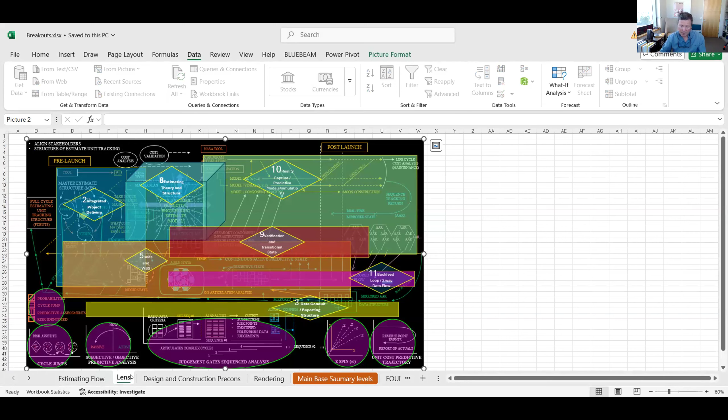Many of you have already filled out the form, so we understand how we can start putting together focus groups, which Patrick is going to be managing.

But before we go there, I want to talk about the rendering that Jabu with Johns Hopkins Applied Physics Lab did a presentation about a month or so ago. This is a very fictitious starting point of what a moon base could look like. It was a fascinating presentation. I hope you have a chance to see the recording if you haven't already.

So the task is, how would we even break out an estimate like this? I have an example to show you, and it also shows the complexity we're dealing with. I've been estimating for 30 years, and many people on this line have been estimating longer than me.

When you see how this can really spiral and cascade into complexity, it's pretty monumental. What I really liked about Jabu's presentation isn't only what he presented, since we had to squeeze it into about half an hour, but also the full presentation posted on the data room, which has the science behind what drives some of these things.

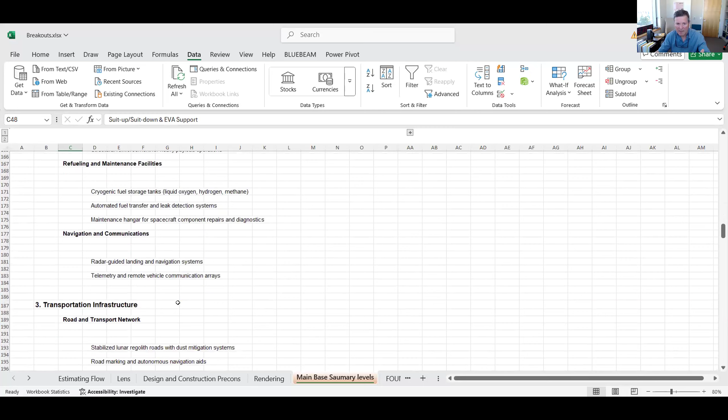So you can see it has science centers, and these are just kind of brainstorming kitchen facilities. And then we go into launch and landing sequences, refueling, maintenance, and on. And we're going to drill down even further, because I want to go through a lot of these so you get an idea that I do understand the complexity.

Because if you take, for instance, stabilizing lunar regolith for roads and dust for transportation and roads, think about just that one line, how that would break out into several more lines. And what's going to be important is that now we're talking about time and mechanisms to actually do the work.

Here on Earth, construction may give unit costs, well it's going to be X, but construction on the moon could be compounding if mechanisms break down, or the regolith isn't working the exact way that we needed, and we're talking maybe hundreds of thousands of cubic yards of regolith potentially. It could be very problematic. So that's why we need to break these down into very detailed components of time, and mission, and whatever.

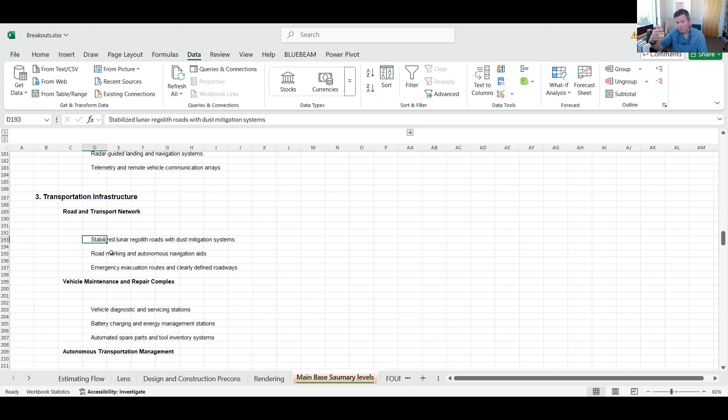But that's just one facet of many of the items that we would have to consider. So I'm going to not spend too much time on that, and let me move this over a little bit so I can see all of it. So we'll go into foundations now.

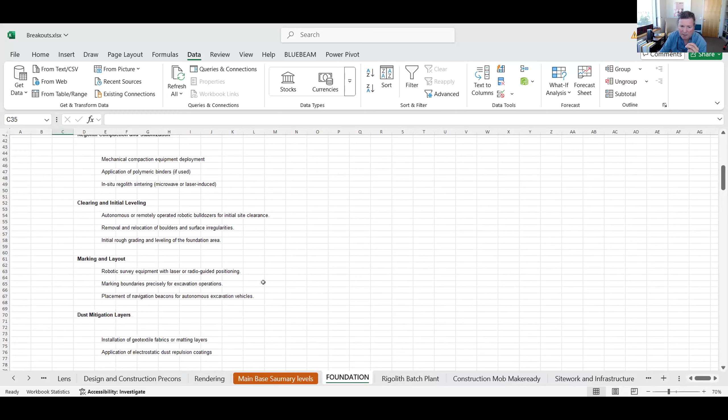And you can see with foundations, all of these - they aren't numbered out yet because we have to come up with a numbering system - but you can kind of read through here: layouts, excavation, earthwork. It says earthwork, sorry that was a typo, my bad.

But you can kind of see all of the components. This is just for foundations. I have checklists on the other thing. So this is what the team is just starting to work on right now: regolith batch plant.

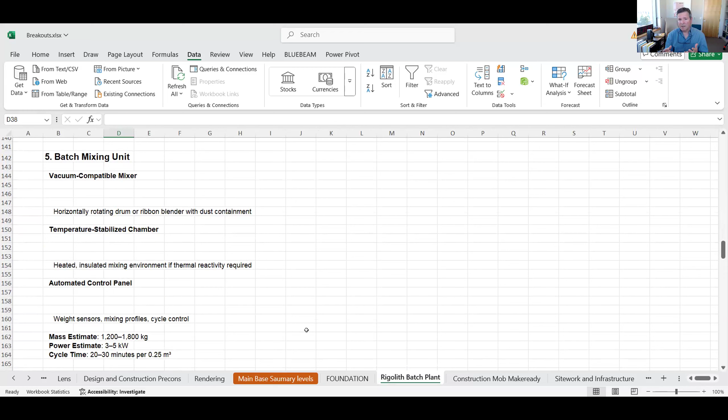Are we bringing it as a payload? Right now, most of the research is trying to figure out how to use existing material from on the moon, as opposed to bringing it there.

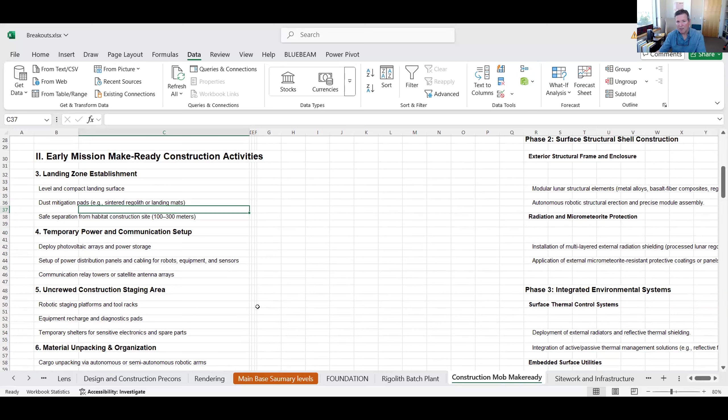Construction mobilization, which is so much more complex than what we are used to here on Earth. If we were building a hospital campus, our means and methods and construction mobilization would be so much less complex than the things we have to think about here.

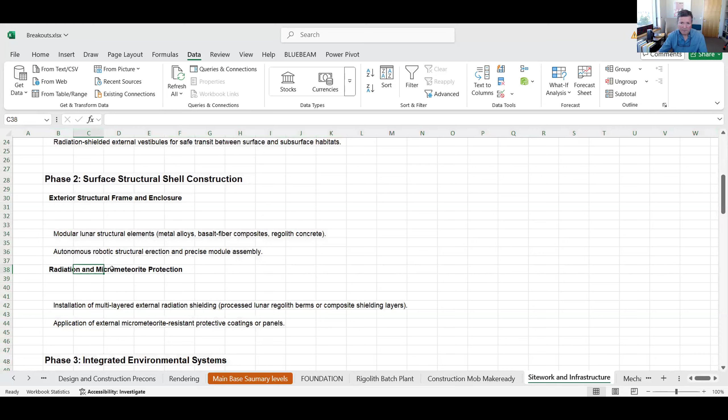I'll just kind of move down here a little bit, to site work infrastructure. Getting the infrastructure, it's probably electrical, let's say. It's not going to be generated, obviously, potentially from a CUP plant connected to a habitat. It probably will be more than likely different systems, maybe not in proximity of the habitat.

I'll just kind of keep moving down here - mechanical and plumbing for the different systems.

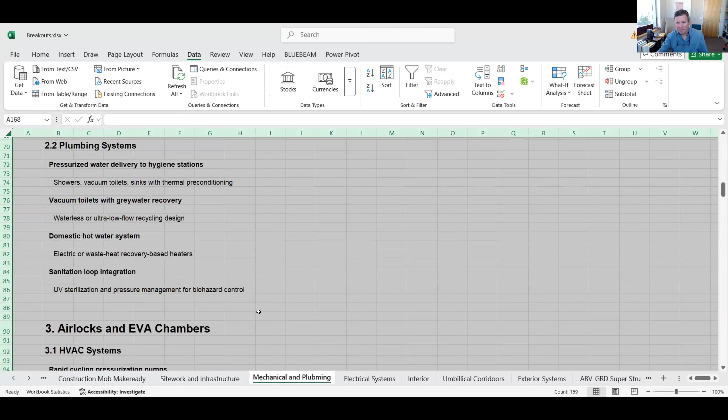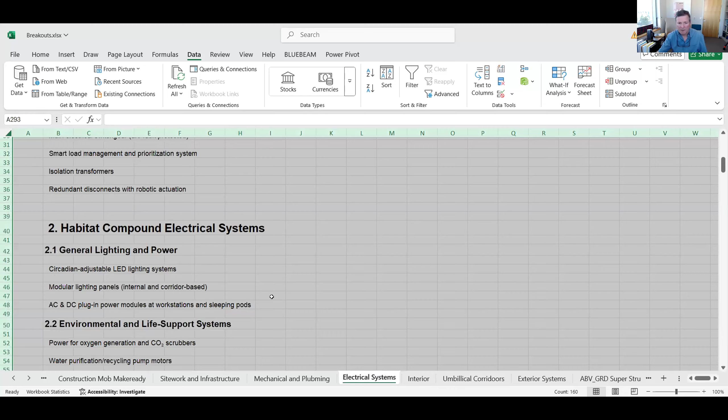Electrical systems, mechanical systems, same thing with electrical systems for habitat. Interior fit out. What would the interior be? What type of flooring, walls, casework, and everything is specialized. And it has to also be brought up, obviously, per payload.

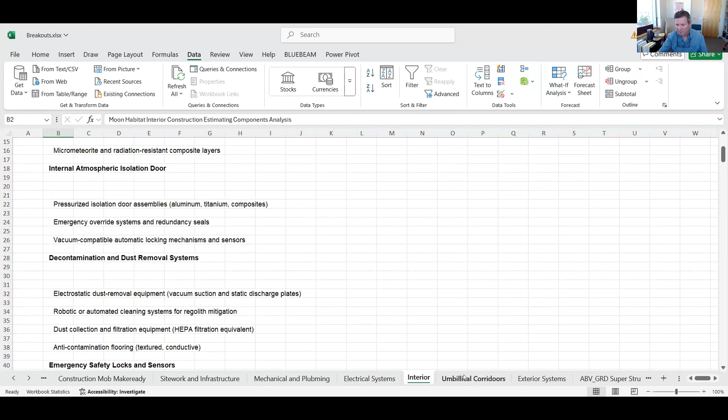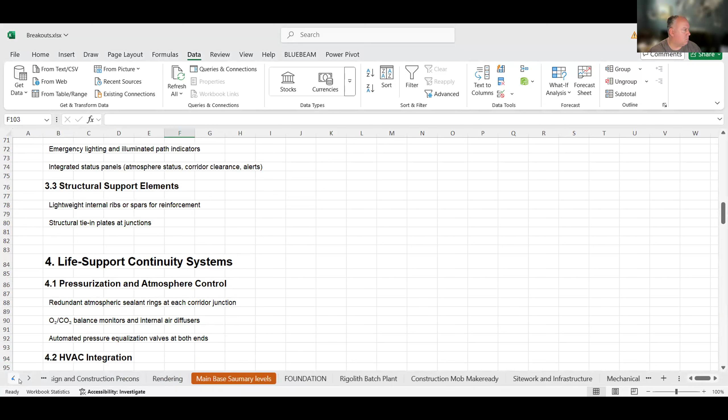These are going to be very important. These are the umbilicals. Let me show you where this is real quick here. Let me see... looks like I can't get over there. There's something on my annotate. Oh, there it is. Well, I have something on. There we go. Let me just show you something real quick.

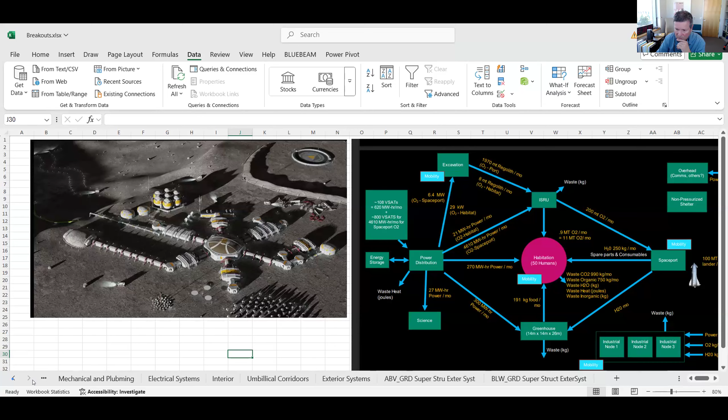These corridors are umbilical. These things are pretty important, not only for safety reasons, but there's a lot of functionality separating these systems. Let me go back here real quick. But each of those connect, and each of those are very complex, even though their function more than likely will be just to connect the two systems together.

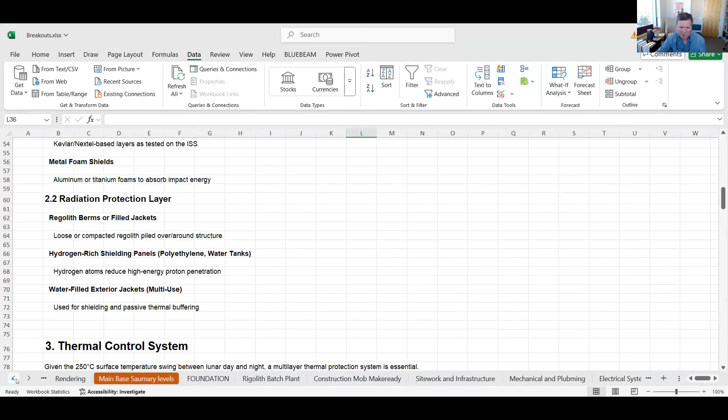Exterior systems. Radiation protection layers. And here's an example. I want to go back to this real quick. It just shows the complexity of why it's important that estimating really understands what's going on. I'll give you an example. You see right here where it says exterior systems. Well, if there's an exterior system and it's underground, that's going to be completely different estimating, perhaps systems that are built if it's underground versus above ground.

To show how this can really be complex in estimating: if you build up layers of regolith—and I haven't heard a lot of talk about this, but there's a couple folks starting to write on regolith charging—if you layer regolith on top, there is a compounding effect. In other words, regolith has electrostatic charge, and the more you increase it, there is a potential of increasing electrostatic charge. Regardless of where that goes, it's important that in the estimating process we understand the risk, and therefore, is it above or is it below?

And each one has a completely different construction process. So you can kind of see superstructure, exterior—all of these are just, again, estimating breakouts.

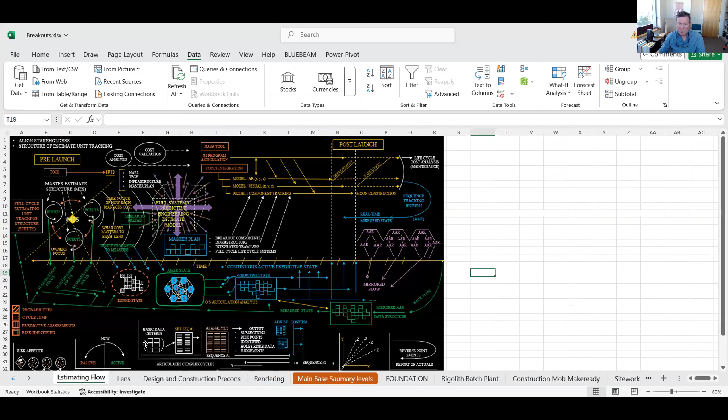So I'm gonna stop there, because I'd like to introduce a couple folks. Are there any questions or comments on what you've seen?

Fred, what's on your mind? I've got to learn how to use my mute button, apparently.

I'm amazed at the detail you've gone into as far as organizing the estimate. Those categories are great—really helpful.

I think the important thing—and all the estimators will get this—is when you have a complex project, you always start overwhelmed, right? Because there's just so much stuff. But when you start layering out the theory behind, or the structure of how everything has a home, that, for me, when the team was working on this, it started to become more manageable. You get more anxiety because it's so complex, but it also creates a level of comfort. That's what kept me up at night—like, oh wow, this is a lot, but at the same time it brought comfort because you can start seeing the rationale and pinpointing the points that are going to be very, very complex.

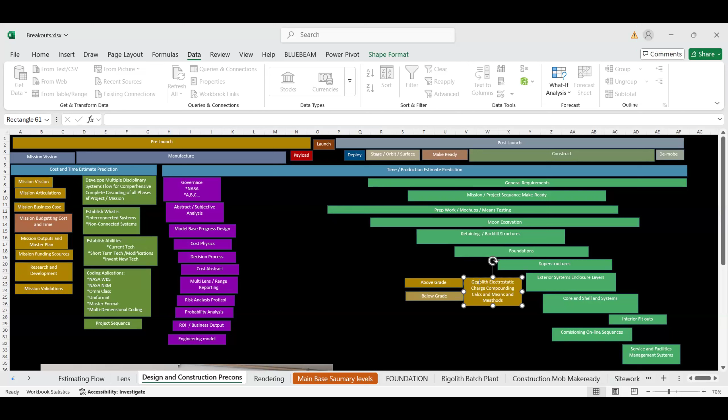But I love what you're saying. So yeah, I don't think we would cut off, Paul. I don't think we would try to eat the horse. No, we would never eat the horse. That's a bad one. We would keep it at chunks that are relevant. That's a contingency plan, I don't know why I say that's a terrible one. Okay, good question though.

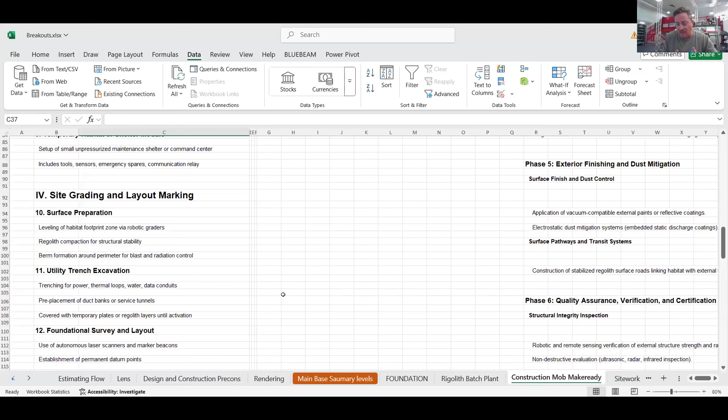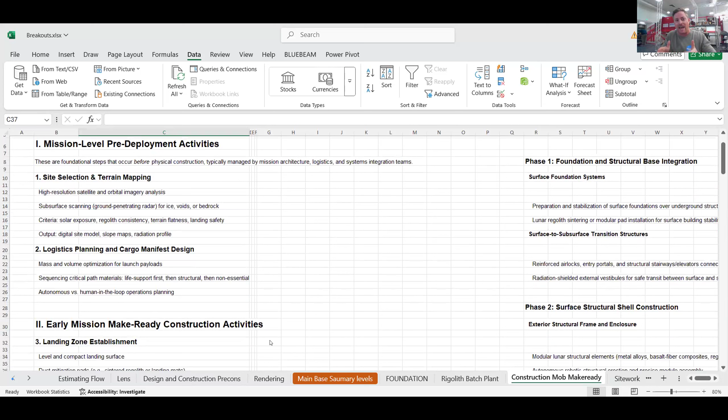There are incremental steps to construction. We don't have a receiving yard on the moon, we don't have a landing pad on the moon, we don't have some of the things we'd take for granted here on Earth. So what I'd recommend is taking a few phases of construction based on either a per-mission scenario or payload mass scenario, and then estimate the costs based on that increment, so the costs build and you can understand what they are at various stages of the overall construction project.

Well, look, Nathan, you said you weren't an estimator, and I think you are. Outstanding, yeah, I think you're very intuitive in that, and it's in line with the direction we're thinking. Estimating is going to be at a more intense state than anyone on this team has dealt with before, so you're absolutely spot on, and it's great to get that type of validation from somebody like yourself. Steve speaks very highly of your talents, by the way. So thank you, that was spot on. I think this is why it's so important to have this multifaceted lens of expertise on the team solving this problem. So thank you.

Great comment. Patrick Duke heads design and construction, and design integration, for Turner Townsend. He oversees all the healthcare projects in the United States. He's graciously helping us put this process together and implementation. He put a very good package together, and Patrick, from day one you've just been amazing, helping organize this because it does take a lot of time.

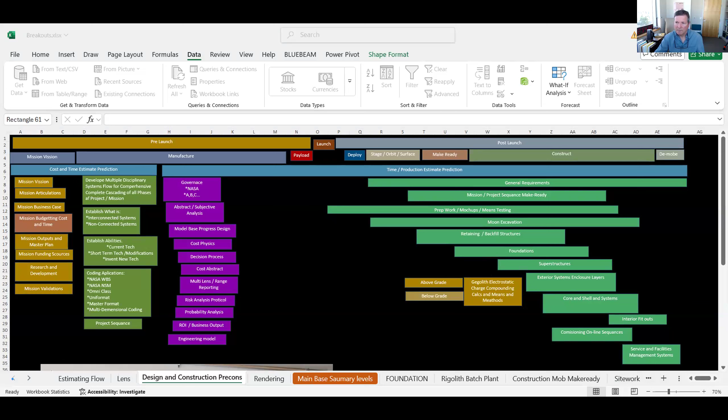So hopefully you can see my screen. If you can't, please let me know. Haven't yet. Let me, I think that may be me. Let me stop sharing, I apologize. Okay, yeah, let me share. Let me make sure I stop sharing here. All right, you guys able to see that on the screen?

Yes, okay perfect. All right, so I'm just going to go through real quick. This is probably the most important piece, is what we're trying to do together. We've got this white paper coming out, which is kind of the level set for this team on what we're trying to do in terms of really starting to look deeper at how this would be implemented. Focus on, yes, the estimating part, but the other parts that have to be completed in terms of what was just said. How do we get the space even ready for construction?

It's one thing to estimate that, but then how do we plan to utilize and work with colleagues where we understand what payloads can be taken, where they can be dropped or not dropped, how all that will work. These are things that have not been done before, but they're smart people. So us working together and enabling communication and collaboration amongst people with a lot of different areas of focus is going to be the key. And we're not going to have all the answers, but we're going to have a lot of the questions that need to be answered.

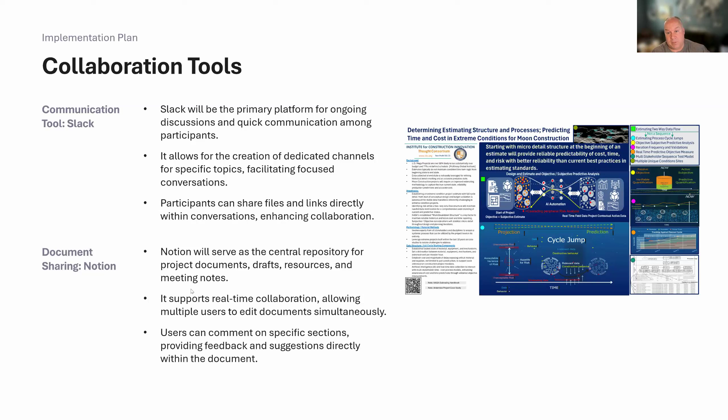And then the Notion site, which you've been on, otherwise known as the data room, which Anne set up and has done a great job of maintaining, that will become our central repository. So you can already get this presentation on the Notion site. So if you're not able to get that link and go to it, you need to get set up for that.

There is a participant agreement that we will be sending all of you after this call. Very simply put, this is to make sure that everybody is aware of what you're going to be participating in. We want to protect the institutions who are the lead institutions in terms of research and our public agencies. We want to protect their intellectual property. There are some things that you'll learn that may not be out in terms of public yet.

It could be theories and things that are being used. We want to maintain confidentiality and protect those institutions. We also want people to understand that you're willingly and voluntarily being a part of this, so you're not seeking to gain any kind of ownership structure in the IP or anything like that.

It's a very simple, you'll see it. It's a one-page form basically that asks you to sign it. And we're just trying to protect our institutions who have so graciously asked us as private industry to come in and be a part of this. And I think that's reasonable.